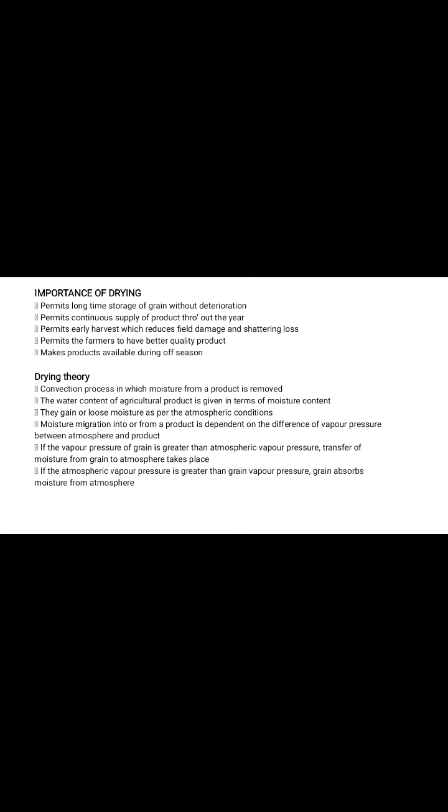The two drying processes are thin layer drying and deep bed drying. Thin layer drying is the process in which all grains are fully exposed to the drying air under constant drying conditions, at constant temperature and humidity. Generally up to 20 centimeter thickness of grain bed is taken as a thin layer. All commercial dryers are designed based on thin layer drying principles.

As represented by Newton's law, replacing moisture content in place of temperature, the moisture ratio (M - Me)/(M0 - Me) = e^(-kθ), where M is moisture content at any time, percent dry basis, Me is equilibrium moisture content, percent dry basis, M0 is the initial moisture content, percent dry basis, and k is the drying constant.

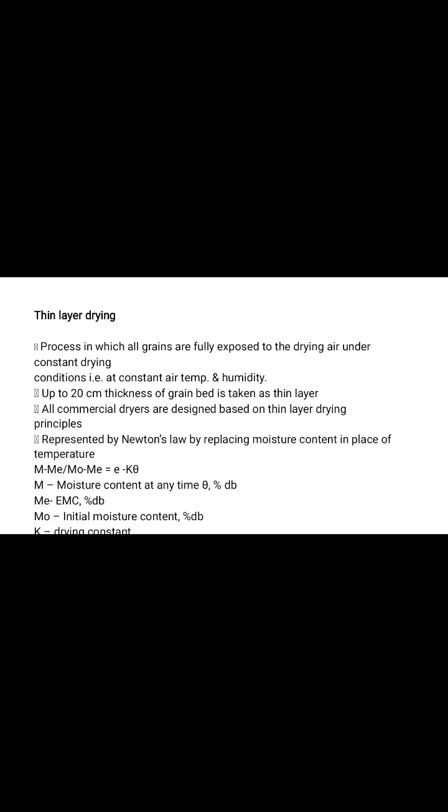Then deep bed drying, the second process of drying. All grains are not fully exposed to the same condition of drying air. The condition of drying air changes with time and depth of grain bed. The rate of airflow per unit mass of grain is small compared to thin layer drying. Drying of grain in a deep bed can be taken as a sum of several thin layers.

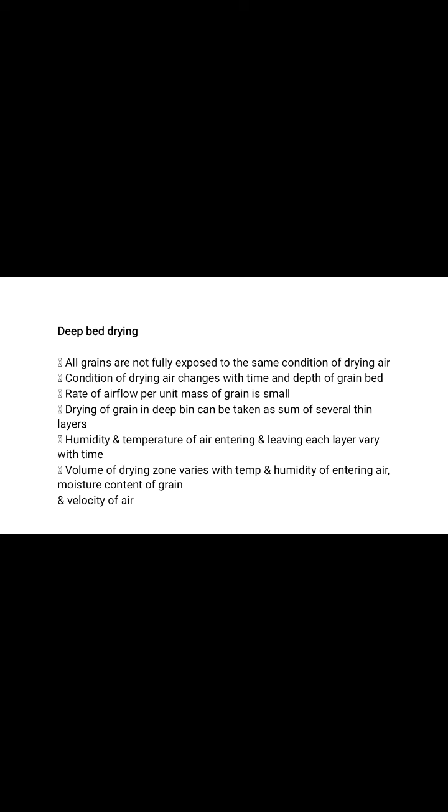First, air passes over the heaters. Then this heated air is forced through the layer of grains, so the bottom grains are dried first in deep bed drying, then the middle, and then the top layer. In this process all grains are not fully exposed to the same condition of drying air.

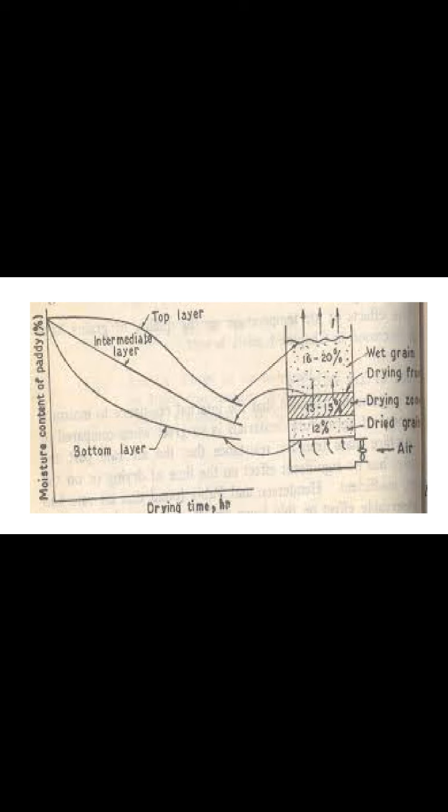Then continuous flow dryers. The types consist of continuous flow mixing type dryers and continuous flow non-mixing dryers. These are columnar type dryers in which grains flow from the top to the bottom of the dryer. In mixing type continuous flow dryers, the grains are diverted in the dryer by providing baffles. They use low airflow rates of 50 to 95 cubic meters per minute per tonne.

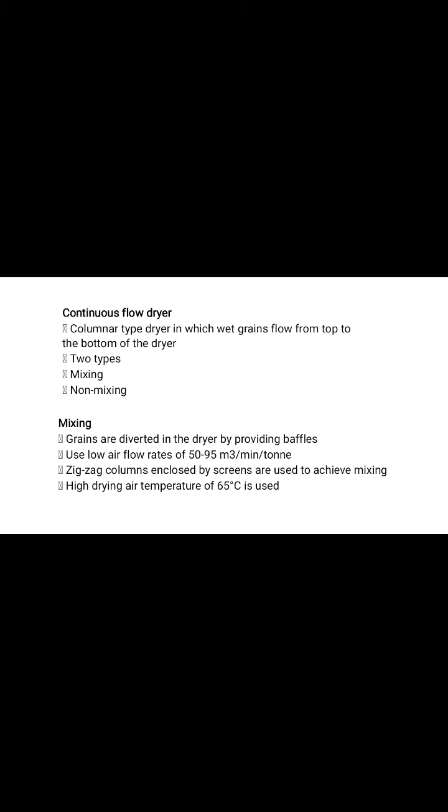Zigzag columns enclosed by screens are used to achieve mixing. A high drying air temperature of 65 degrees Celsius is used in continuous flow mixing type dryers. In non-mixing type dryers, the grains generally flow in a straight path. Baffles are not provided and drying takes place between two parallel screens. Higher flow rates can be used, and a drying air temperature of 54 degrees Celsius is used. The baffle dryer is one of the continuous flow mixing type dryers.

It consists of a receiving bin, a drying chamber fitted with baffles, and a plenum fitted with a hot air inlet. The baffles are fitted to divert the flow and also for achieving proper mixing. In the drying chamber, the grain is fed at the top and moves downward in a zigzag path where it encounters a cross flow of hot air. A bucket elevator is used to recirculate the grain till it is dried to the desired moisture level. In this dryer, a uniformly dried product is obtained.

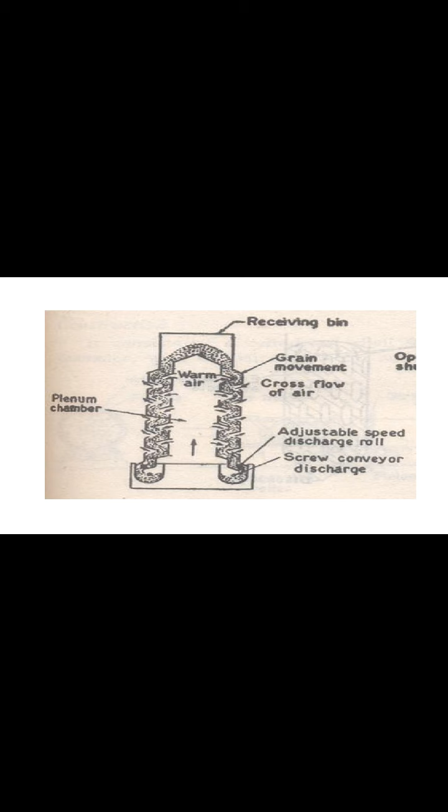With the help of baffles, the grains move across the flow of air. At that time our grains are exposed to the drying air conditions and uniformly dried in a baffle dryer. At the bottom side are the discharge mechanisms. Discharge rolls are provided as per the capacity, to discharge the dried grains at the bottom side into discharge spouts.

So it consists of a feed hopper, plenum chamber, exhaust air, dry grain outlet and screen grain columns. Then continuous flow non-mixing dryers, meaning the recirculating batch dryer. The continuous flow non-mixing type recirculating batch dryer was developed by the Post Harvest Technology Centre, IIT Kharagpur. So this is the continuous flow non-mixing type dryer.

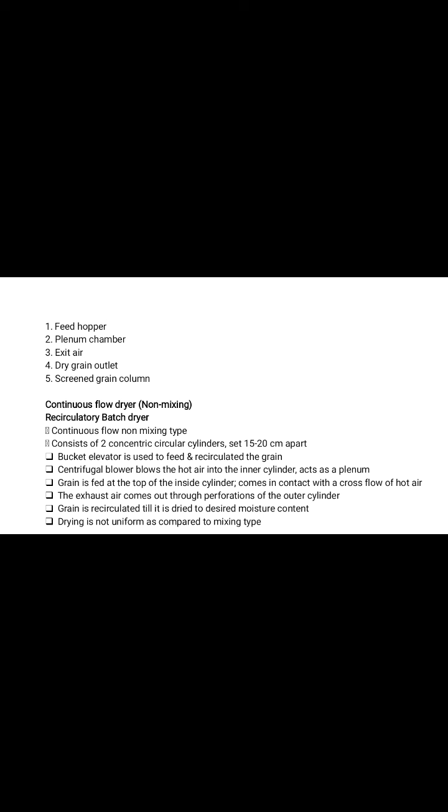It consists of two concentric circular cylinders set 15 to 20 cm apart. A bucket elevator is used to feed and recirculate the grain. A centrifugal blower blows the hot air into the inner cylinder, which acts as a plenum. Grain is fed at the top of the inside cylinder and comes in contact with the cross flow of hot air. Exhaust air comes out through the perforations of the outer cylinder. Grain is recirculated till it is dried to the desired moisture content, and drying is not uniform as compared to mixing types.

So this is the recirculating batch type dryer, generally called the PHTC dryer because it was developed by PHTC IIT Kharagpur. It consists of a perforated inner cylinder. This is the perforated outer cylinder. Then the bucket elevator for recirculating the grain. This is the downward grain movement by gravity. This is the drying air inlet.

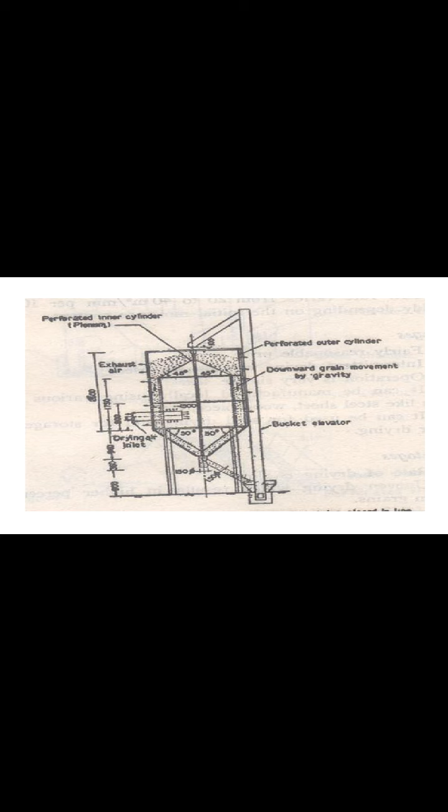Then the LSU dryer. This dryer was developed at Louisiana State University in the USA. It is a continuous flow mixing type dryer, mostly used in India and the USA. It was developed specifically for rice to ensure gentle treatment, good mixing and good air to grain contact. It consists of a rectangular chamber, holding bin, blower with duct, grain discharging mechanism and air heating system. Layers of inverted V-shaped channels are installed in the drying chamber. Heated air is introduced to these channels at many points.

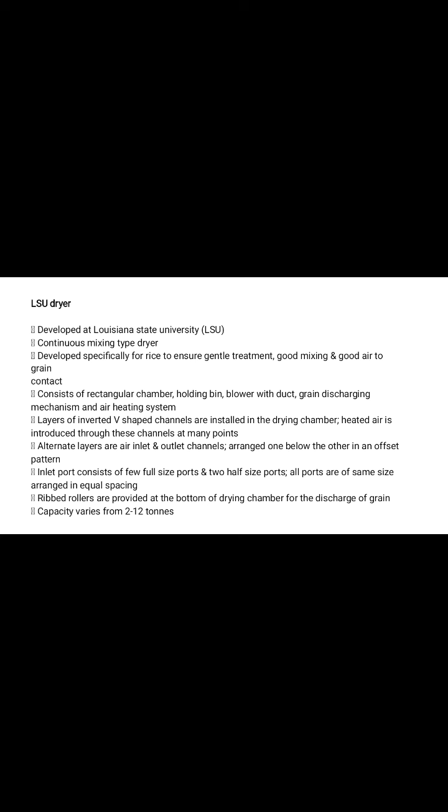The recommended airflow rate is 60 to 70 cubic meters per minute per ton, and temperature 60 to 85 degrees Celsius for raw and parboiled paddy in the LSU dryer. A uniformly dried product can be obtained using the LSU dryer. It can also be used for different types of grain, but there is high capital investment in the LSU dryer.

Then rotary dryers. These are continuous flow dryers. The foodstuff is contained in a horizontal inclined cylinder through which it travels, being heated either by airflow through the cylinder or by conduction of heat from the cylinder walls. In some cases the cylinder rotates, and in others the cylinder is stationary and a paddle or screw rotates within the cylinder, conveying the material through the drying chamber.

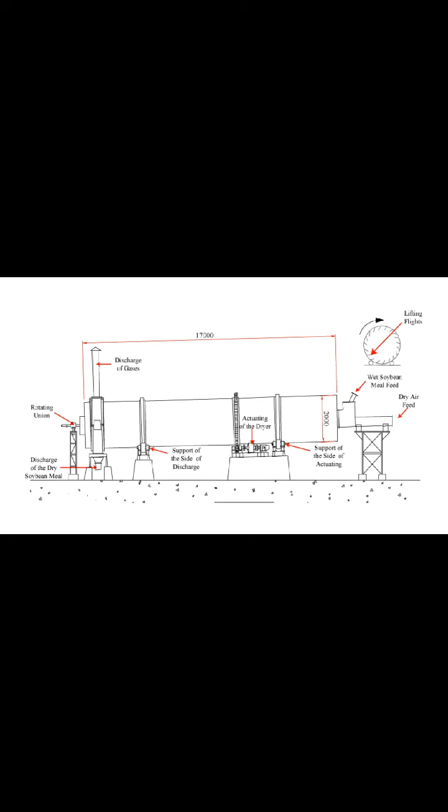So this figure shows the rotary dryer, consisting of lifting flights inside the dryer, the feed inlet, the air inlet, rotating unions, and the discharge system provided at the other side, the support on the discharge side, the support on the actuating side, and an exhaust system provided to exhaust the gases. Thank you, students.